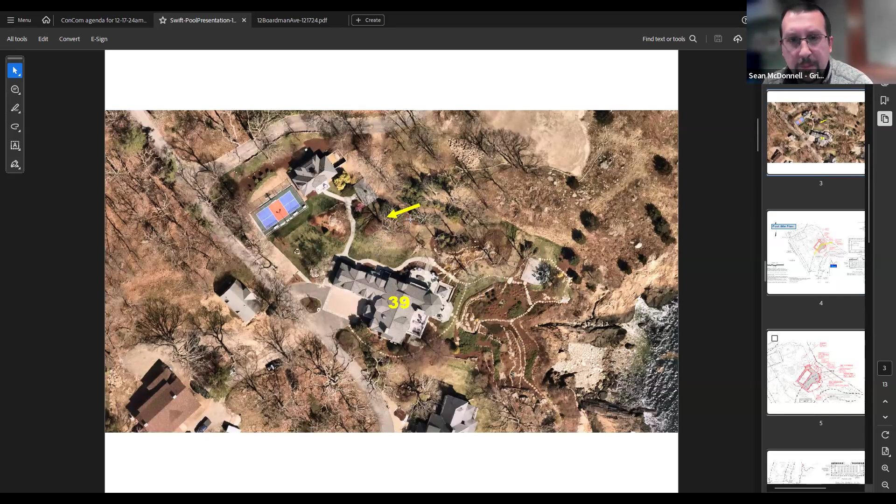There's numerous plant beds around the property. There's an extensive amount of planting along the coastal bank. I think you guys saw another plant down here. So I don't think this area of lawn is going to be too detrimental if we change that to a pool deck with stormwater management. But I see your point.

Was this part of the alternatives analysis? There's no alternatives analysis required unless you're in the inner buffer zones under the bylaw.

Not that people don't think about it anyway, and we often have discussions about whether it's possible to shift the project design somewhat so that less or none of the permanent impact is in the buffer. Does that answer your question.

If I remember correctly, that is an area of exposed ledge outcrop to the north. There's a small area here, you can see it on the plan. There was a small chunk of ledge where the pool is going that will have to be removed. Just in that area. And a larger one to the northeast, northwest.

Well, over here too, there's actually some more to the southeast as well.

It's clear that moving the pool deck, if it's going to be of any size, to the other side requires kind of reconfiguring the other aspects of the property and possibly having a multi-level deck to accommodate that ledge. So it's not a simple solution. It's also not as accessible to the house if you flip it over. Yeah, possibly.

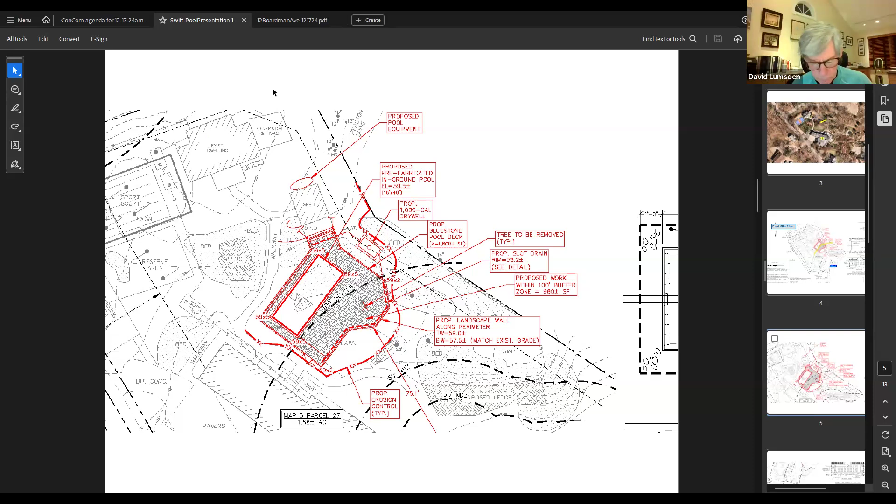Jeff? Aye. Gordon? Thank you, that's an aye. David? Aye. Thank you. Henry? Aye. Olga? Aye. And I am an aye as well.

So that is unanimous. Shall we take a peek at conditions for this? We have the benefit of our absent vice chair's preparation of a draft, which I've been over briefly. Yeah, there it is. Let me share my screen.

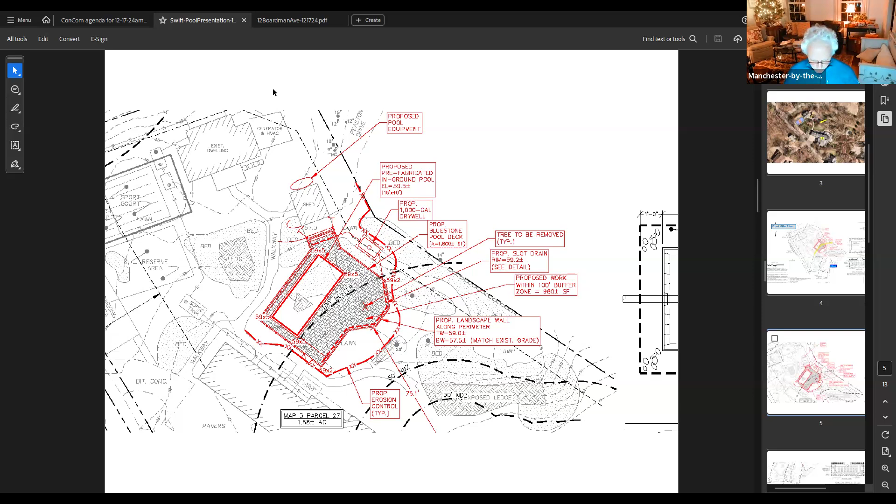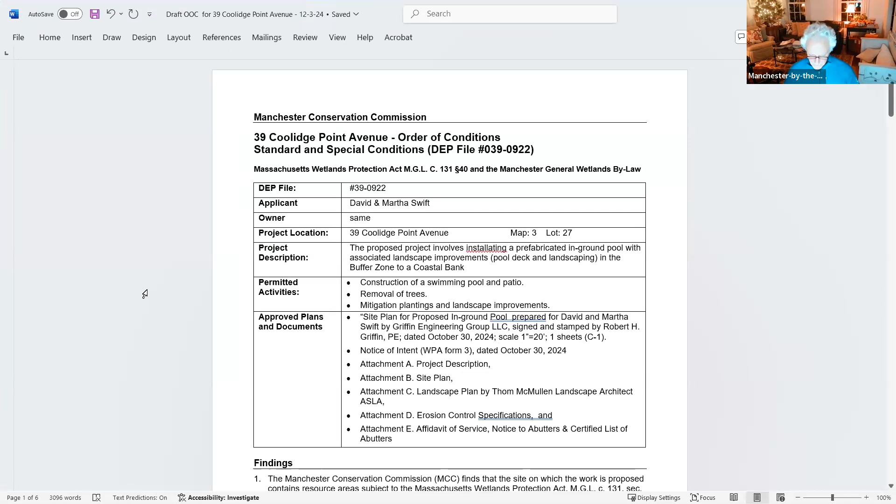Easier said than done. Okay. That's not the right one. That's the right one. Can you see it? Yes, yes. And is it legible? Yes, yes.

Okay, so there's some typos to fix, but there's the boilerplate findings, boilerplate general conditions.

Pre-construction—I think the only thing added here is that we require a certificate of compliance if the other work is still open. I suspect it's already been obtained. Do you know, Sean, if that's been closed out? I think we still need to file the certificates of compliance for the other NOIs. Okay, well, that would be a good move then.

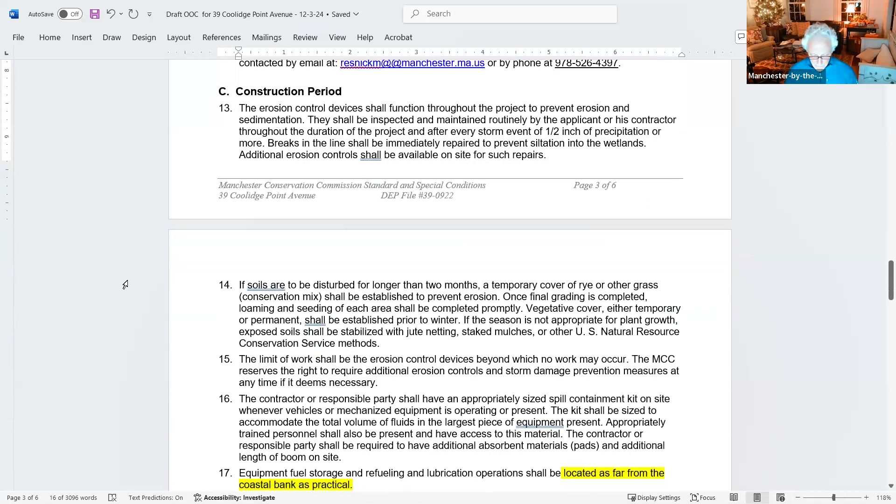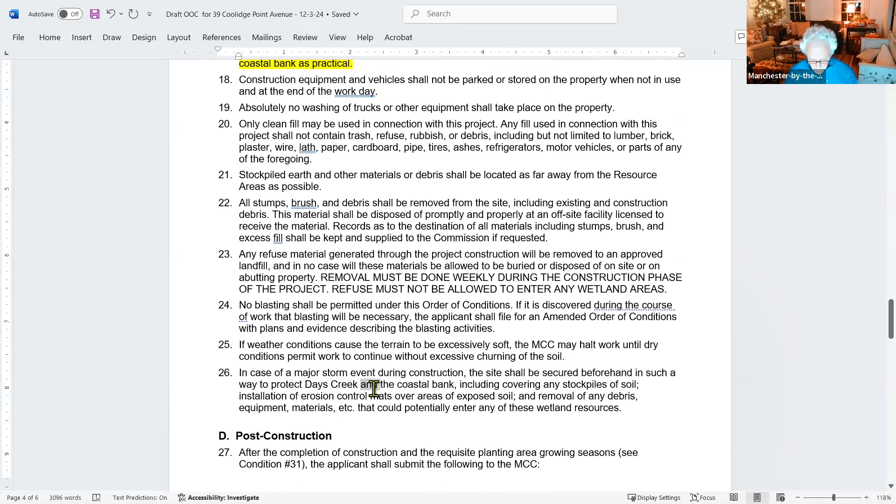Construction pollution prevention plan. We allow equipment storage, fuel storage, refueling and lubrication operations, but as far from the coastal bank as practical. We have to fix that—not to protect Days Creek, but to protect the coastal bank. Post construction.

Now, special conditions. I follow the pollution prevention plan. If any wood is used, it'll only be untreated wood. I don't remember any landscaping elements of wood in this plan.

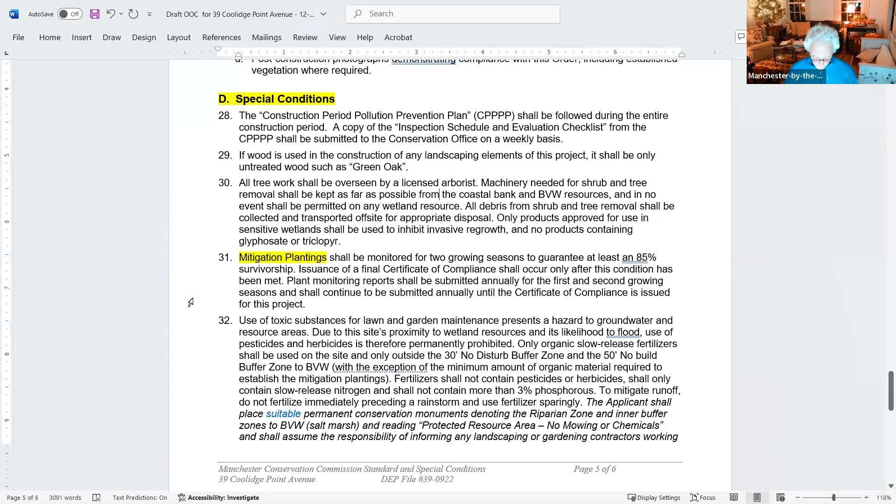Tree work overseen by a licensed arborist. Machinery kept as far as possible from the coastal bank. Mitigation plantings with 85% survivability for 2 seasons, with reports.

No toxic substances. Yeah, here's another sentence that's unneeded. De-icing chemicals to the extent they're needed there. And we are stipulating here a low chlorine method such as ultraviolet.

Is that what the applicant envisions, Sean, or do you know? I'm not sure the cleaning method of the pool. I know it's a fiberglass pool, so I think you can pretty much do anything with a fiberglass pool, but I'm not 100% sure what method they had planned. Okay, well, we'll put in low chlorine and a requirement of dissipating before dewatering.

Selection of some of the conditions as perpetual, including operation and maintenance for the stormwater management. There are no pervious features on this project, right? No. So stormwater management, mitigation planting remains vegetated.

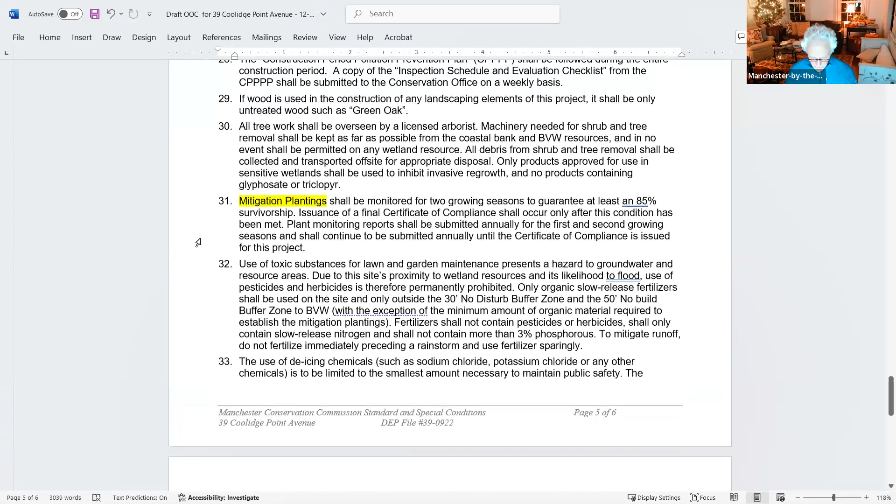And I think we've called for monumenting. No, we have not called for monumenting in this case. That's because all of it is going to continue to be landscaped and maintained.

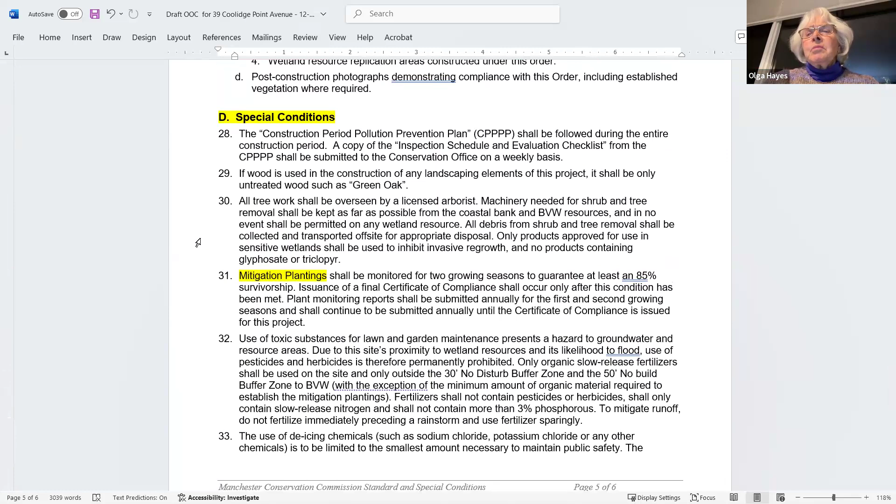Okay, any questions, suggestions, edits, additions to this? So should we also add the pool maintenance and drainage in the perpetual? Or is it fine up there? I think it's reserved there, 31 through 37. Yep, it's reserved because it's— oh, okay, 36. Okay, yep, thank you, good catch.

35 can actually come out, but if there are no pervious surfaces, then it doesn't have any effect. Leave it in.

Okay, commissioners ready to vote on this then? Yep. Can we take that out, Steve? Say again? You said that could come out. Could we take it out? Yes, it could come out. You have to renumber. I'm sorry about the renumber. Okay.

Why don't I just make it a contingent one? Not the most elegant wording, but you get the point.

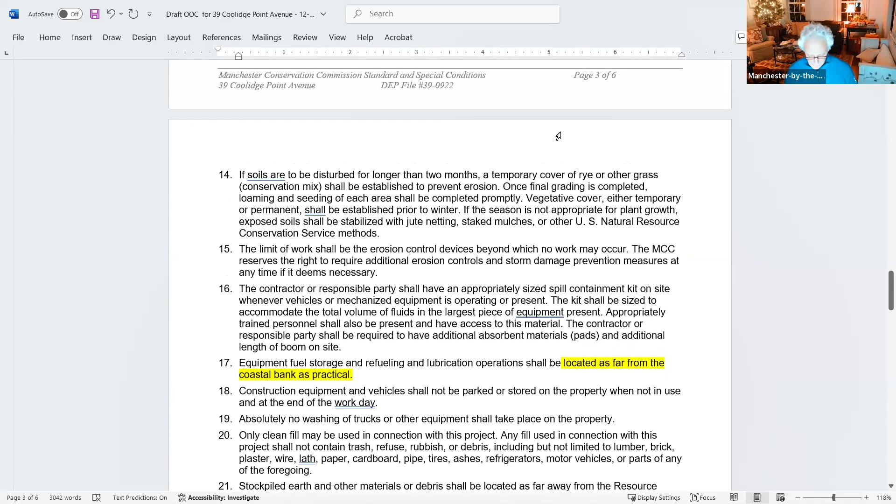It is unanimous. Thank you, Sean. Thank you, guys. Thank you.

Commission ready to turn back to 6 Ashland? Yes. Okay.

Once again, we have a draft largely from Suri with a little bit of input from me, which I will share.

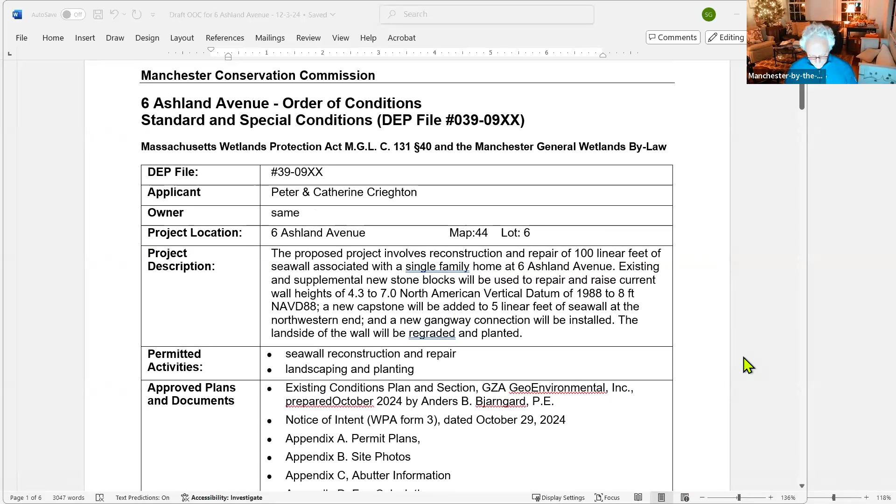Okay, the findings, as expected, the boilerplate general conditions, pre-construction visits, and we have in here obtain and document compliance with the town tree policy, but there is no tree removal proposed here, right? So let's take that out.

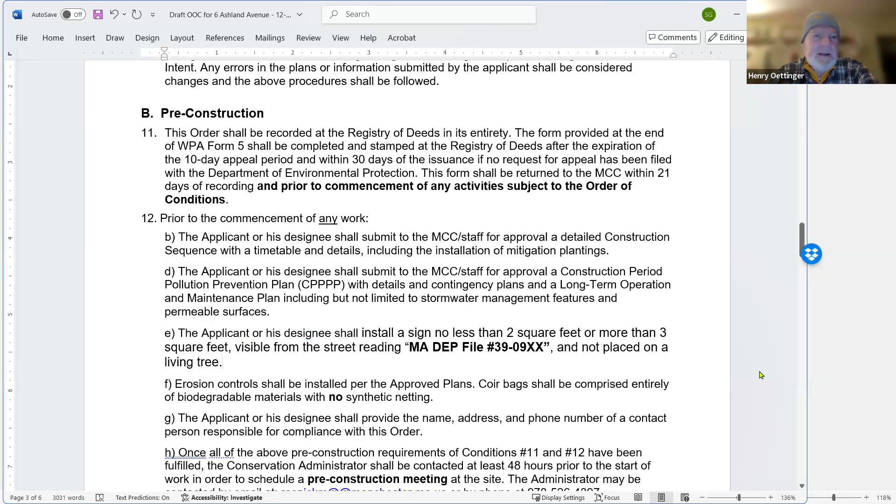Well, that didn't work very well, did it? We'll do some renumbering when we issue this. There's no harm in leaving it, unless it's for compliance with a standard, Steve. Okay, back in.

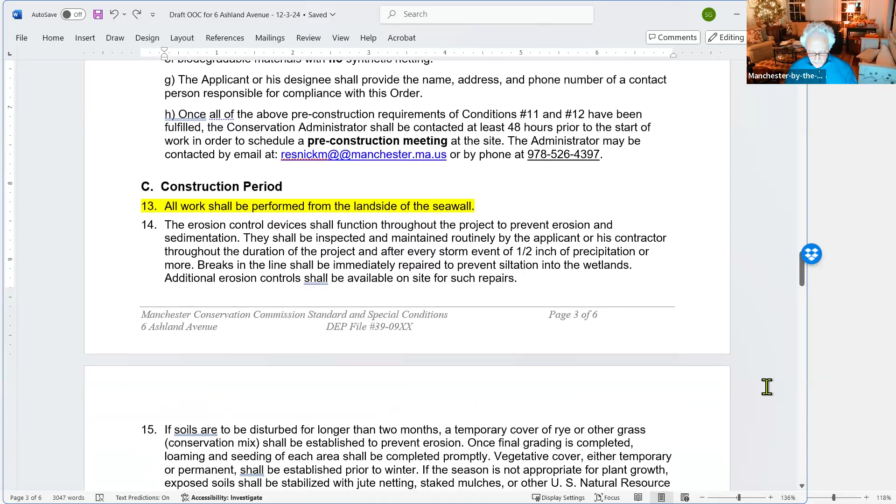All work done from the land side is specific to this project. Temporary cover: locate your equipment and refueling as far from the coastal bank as practical.

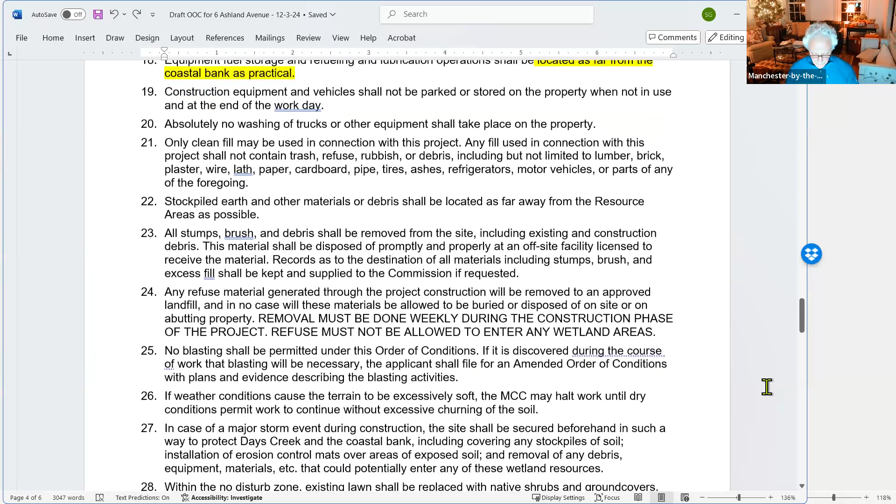Debris. This one would have monuments. If we specify areas that require no mowing, this is drafted to say within the no-disturb zone, which goes most of the way back to the studio, the outbuilding, just past the willow tree.

So that's one option. Another is what Jeff was talking about, to have a border of grass or shrub that's shallow rooted but would provide some additional velocity break and potential habitat. The third would be to have patches of it, which is what Lolly was thinking of. That's what Olga was thinking too, put it behind the wall there, a strip of it.

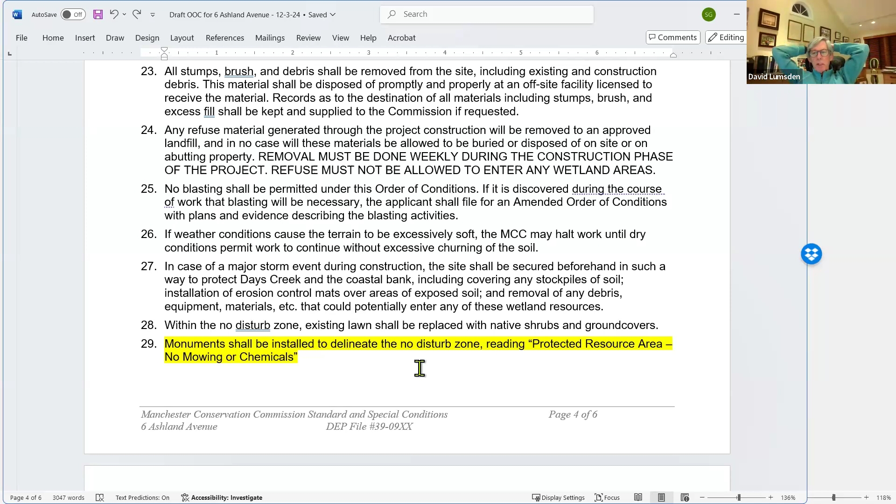That sounds sensible to me. That might be a safety factor for children, and plus it would allow him to continue to use that back area as a play area for his kids. Good points. And I believe the wall is going to be visible above grade for some distance.

I don't remember whether we were told it's a foot or 2 feet. 1 foot, yeah. So it'll soften that element of it.

What kind of monuments are we talking about here, Steve? We're generally accommodating whatever the applicant wants to use, but something relatively permanent: wood, a large post, or small granite monument. We've sometimes, because of the need to really enforce, required boulders so it isn't possible to mow around or beyond them, like a couple of cases on Proctor. Well, I doubt that's required here. No, I don't think so.

Susan St. Pierre, I think your hand is up. Is it in relation to 6 Ashland? Yes. On that condition, we just want to make sure they have access to their gangway. Oh yeah, absolutely, so there'll be a gap in the planting, or stepping stones or something to get you through the higher grass. Thank you.

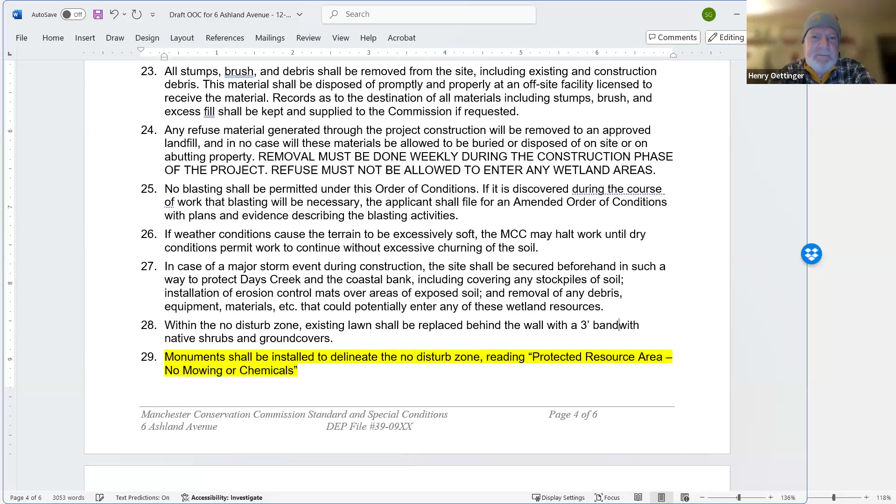Existing lawn shall be replaced with a 3-foot wide band behind the wall. Well, it's not going to be replaced everywhere, it's going to be mowed to accommodate access to the dock. That's the second point, first we've got to establish the band. Existing lawn will be replaced behind the wall with a 3-foot band of native shrubs and ground covers,

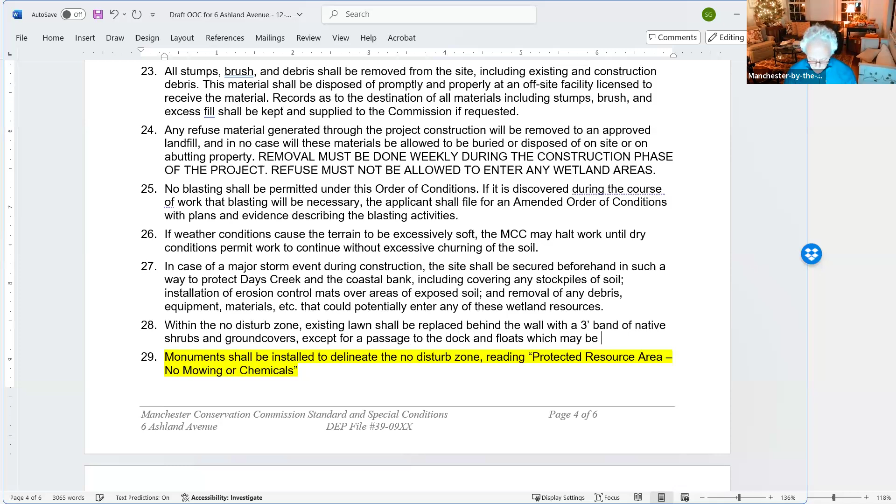except for a passage to the dock and floats, which may be mowed for access. Okay, and I'm not sure we need monuments to protect a 3-foot strip. No, no, good, seems to be asking a lot.

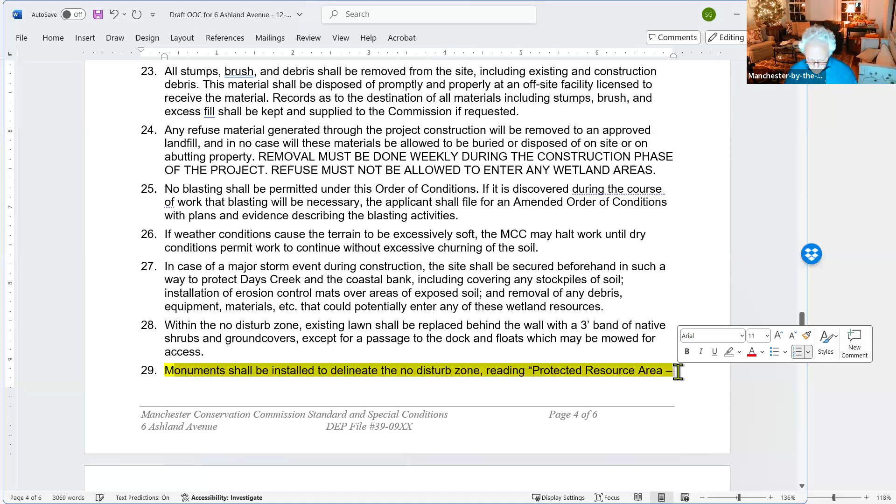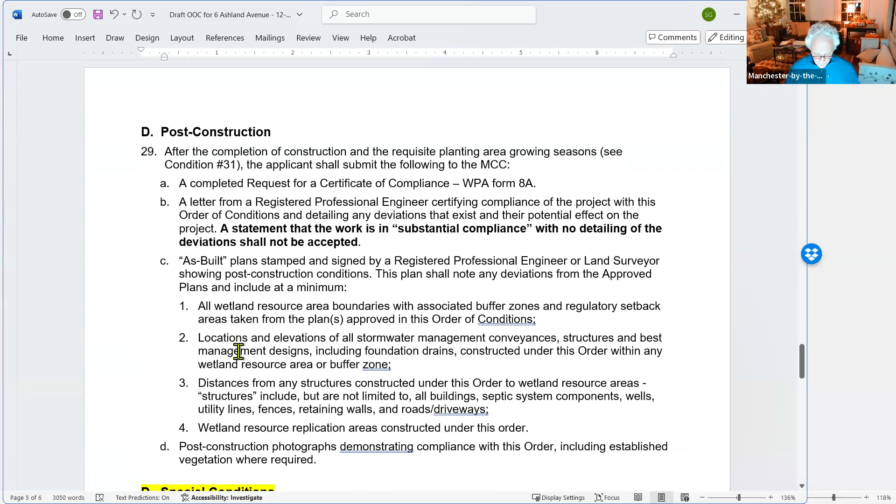Okay, post-construction, let's - I had a quick question if that's all right. Yes, go ahead, Lucas. So under that condition talking about native shrubs and ground covers, would that - I know earlier we talked about some fescue type or the Pennsylvanica carex.

Similar species, like a grass-type ground cover, native, that's what Lolly was talking about. Would that still constitute under this condition? Yeah, why don't we make that clear with shrubs and/or ground covers, let's make the band shall consist of that.

Actually, I guess we want the band to consist of that, and we want the lawn to consist of that. I'm not following, how much of the lawn are you talking about? Is Lolly still on? Can that be mowed? Not the 3-foot band. I'm trying to help you keep one thing consistent - if that's mowable, then just use it for the lawn and the band.

I think if you went with Carex or other fescues, you can mow it if you want to. The virtue of it is you don't need to. If you let it grow up to its mature height, which is fairly short, like 4 or 5 inches, it looks different but not unattractive at all, and requires no irrigation.

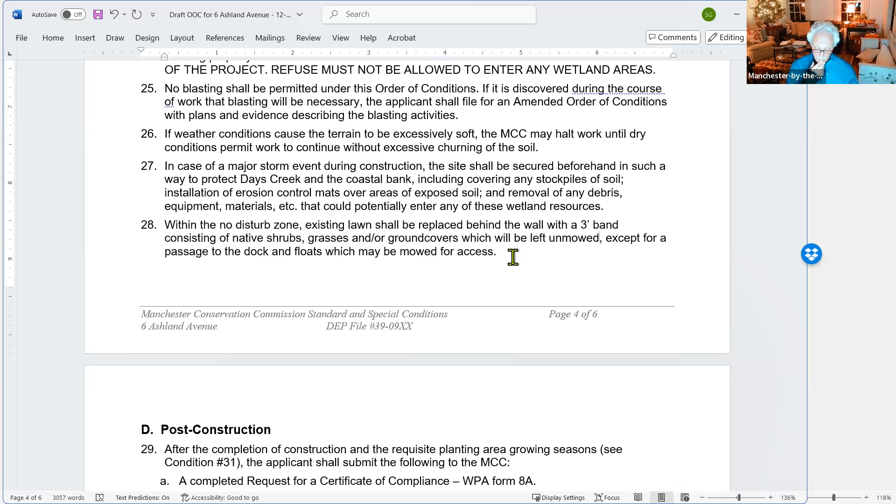And to be technical, if it was mowed in the fall, that wouldn't be a terrible thing either. No, but we never said that.

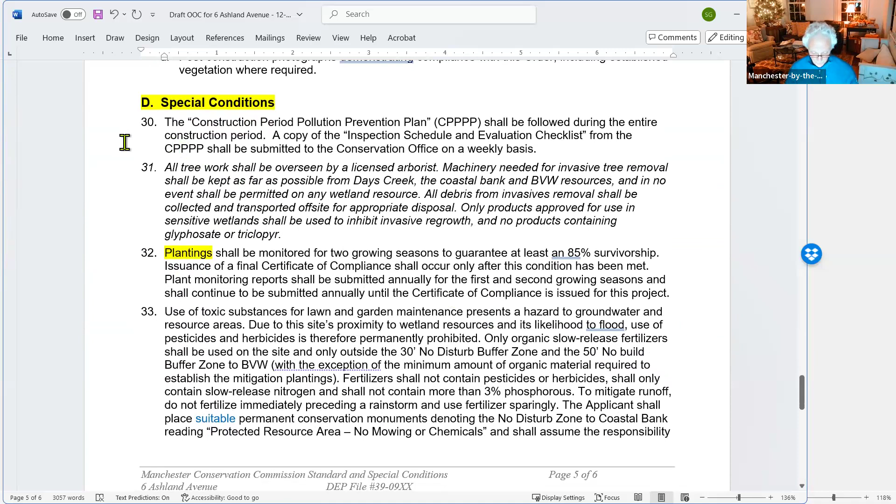Okay, post-construction and special conditions are the standard construction period pollution prevention plan. Tree work, we do not need. Invasive removal, we do not need. Survival of plantings, yes.

I think it's a good idea to minimize nitrogen and phosphorus and any pesticides or herbicides in this area. Yes.

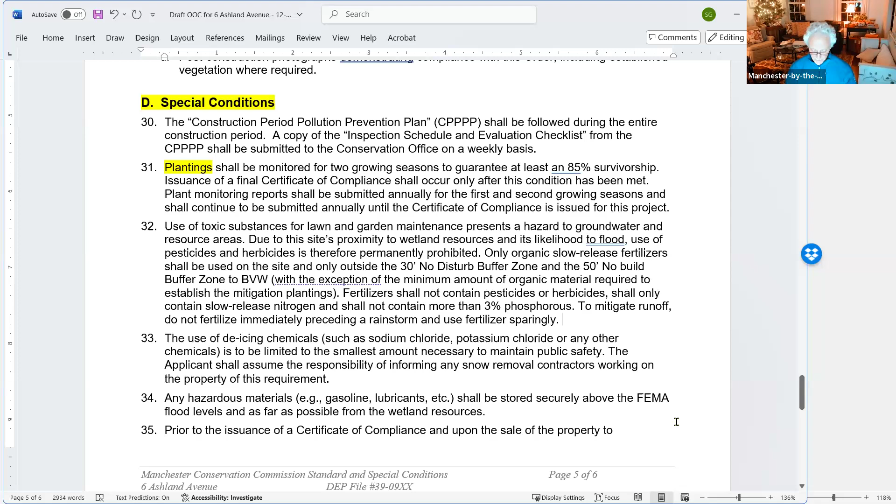And we'll take out the frequency. I don't think de-icing chemicals are going to come into play, but no harm in leaving it. Hazardous material, that's a good idea because of the flood.

Steve, why did you take out that last statement? Because we're not requiring monumenting here, but we think it's needed to require that there's no mowing or chemicals. Well, no chemicals. Well, for the 30-foot strip, yes, but we assumed it didn't.

It's small enough not to require a monument. Am I wrong there? No, I don't think that needs a monument.

And for the sake of the harbor and water quality, it would be great to minimize the use of high-powered, quick-release fertilizers or pesticides or herbicides within at least the 50 feet no-build and no-disturb zone.

That's part of standard conditions, is it not, Steve? Usually, yes, I can't think of exceptions to it. Is it in the standard conditions above? No, it's in special conditions, because it's usually associated with mitigation plantings and the extent of impact to the buffer zones.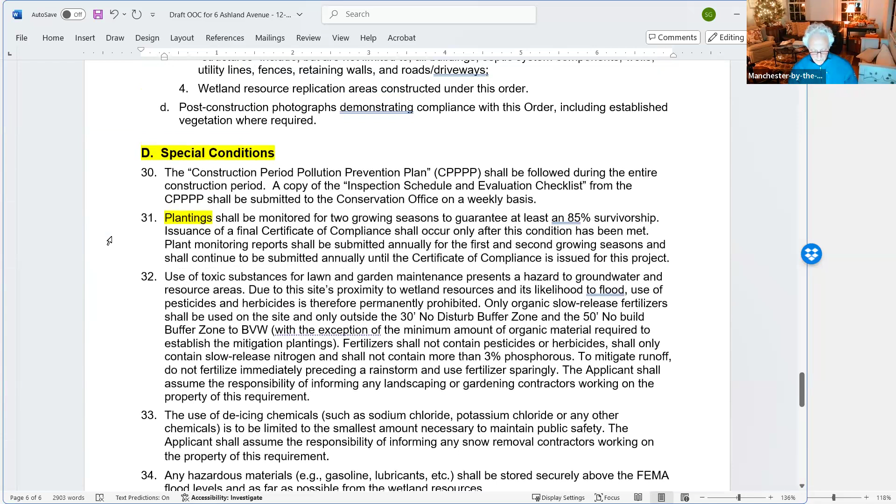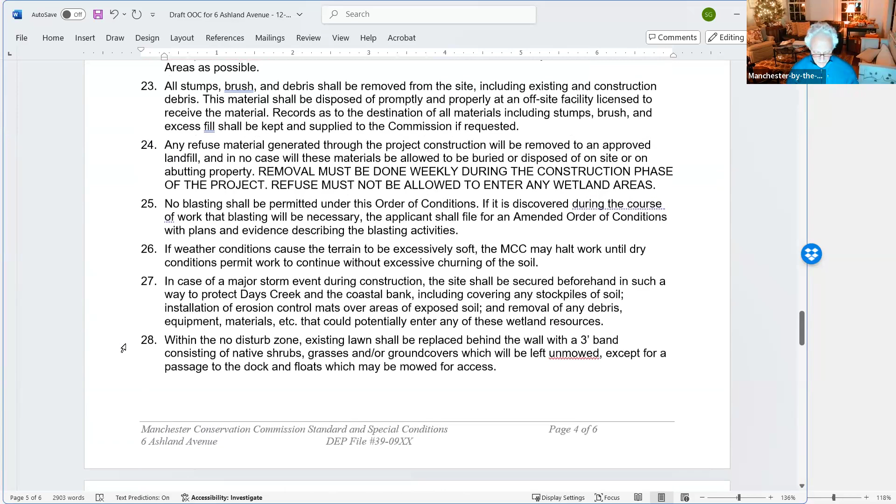I think that's right. So we're leaving out the construction period and the growth survivorship period. Let me just take us back through the special and perpetual conditions.

Looks okay to me. Steve, any final suggestions? Do we need to condition anything about the various permits that are required, or do we just let that process take its course? I think those are in our standards here.

Okay, anything else we want to call out? I mean, this one was meant to be comprehensive. Doesn't mention coastal zone management, but it's implied if it's needed. And 91 is included in that, Steve? I think so, yes. Okay, Corps of Engineers.

All right, so I move we issue this order of conditions with the pertinent special and perpetual conditions for 6 Ashland Avenue, DEP file 39-923. Second. Moved and seconded.

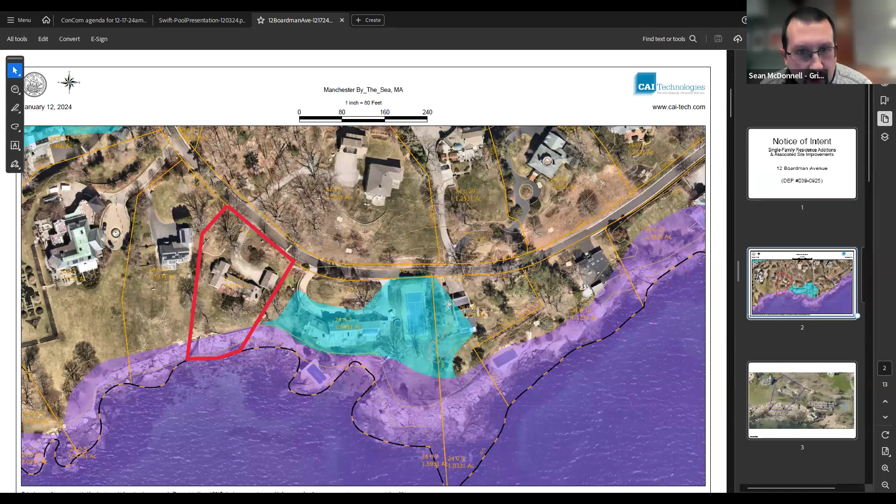This is a GIS map of the area showing some flood zones and the property boundaries. Boardman Ave is up here on top. There's a driveway that comes down in front of this house - a single family house, single story. This is the ocean down here. You can see there's some flood zones at this site - a V zone shown in purple, and a smaller A zone shown in cyan.

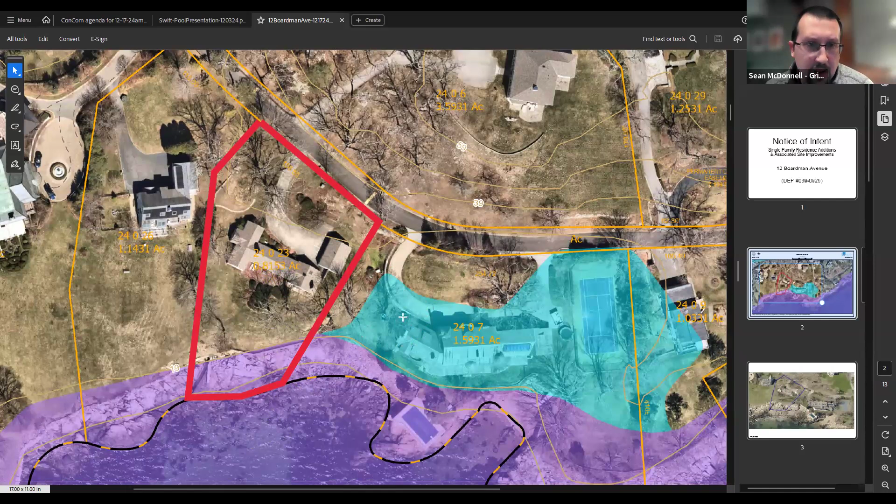Here's a better photo of the spot. The applicant is proposing to construct some building additions on the house and redo the patio in the backyard.

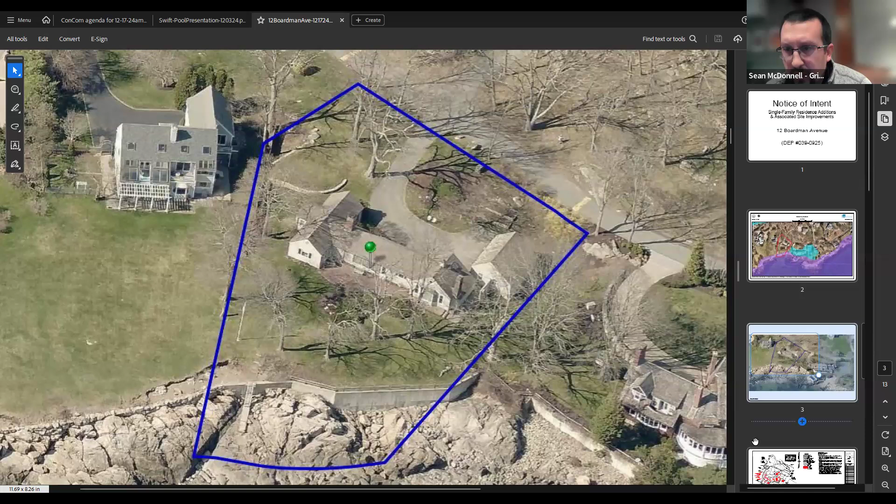Here's a site plan. The red areas are the proposed improvements. There are 4 small building additions going on around the house, the hatched areas here - about 300 to 400 square feet total. This brick patio is going to be converted to a pervious bluestone patio. We're also proposing a small spa here - the square shown is the spa - and an outdoor shower on the side of the house.

You can see our coastal bank line comes pretty close to the house. That delineation was based on the FEMA flood zone elevation of 35 feet - that's the A zone here. This site is a little tricky because it has both a V zone and an A zone. The V zone runs along the seawall, and the A zone is off on this neighboring property. It's at elevation 35, which is pretty high relative to the grades on this property. Typically we draw A zones at the contour matching the base flood elevation, but in this case it's more complicated. We have a LOMA request filed with FEMA for additional information. Right now, as drawn, the house is shown outside the flood area.

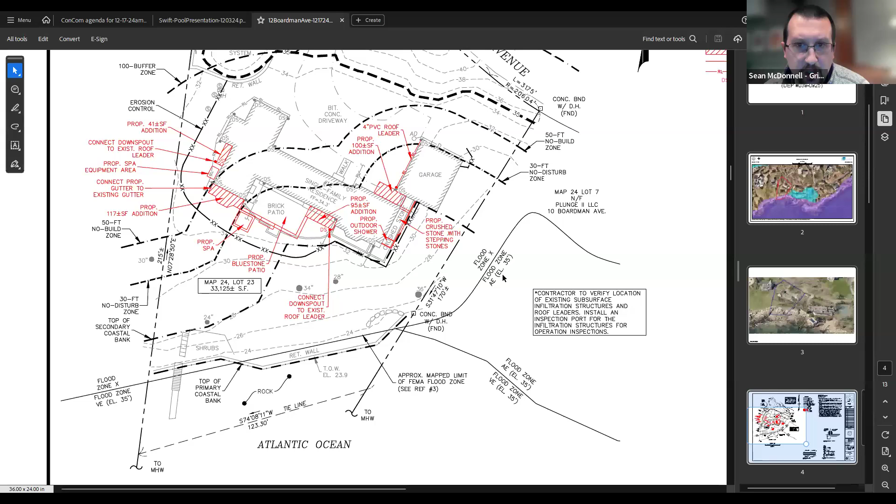Based on that elevation 35, the coastal bank ends up being pretty high on this lawn. This is a lawn area, and this is the top of the wall down here. The coastal bank ends up extending up to the house because of how DEP defines it - the area below the base flood elevation that ceases to be greater than a 4-to-1 slope. So that's what that line depicts. It ends up being pretty close - if this base flood elevation was lower, it would be the seawall. It's really just because of how FEMA defines that flood zone.

And in practice, does water come over the seawall, say in those January southeasterly storms?

Do you want me to respond to that? Sure. I've spent one winter there, and no - the base of the house, as I understand it, is about 32 to 33 feet above mean high water. We have seen some storms, but I've never seen water get even really to the base of the seawall other than wave action. When waves hit the rocks, the spray can come up onto the lawn, and there's some scouring effect on the lawn, but I've never seen water come up even near the top of the seawall.

That is an unusual FEMA finding. Yes, we're expecting to hear back within the next couple weeks, maybe longer - I think they have 60 days to respond. We filed at the beginning of November with FEMA, so we're waiting to hear back from them.

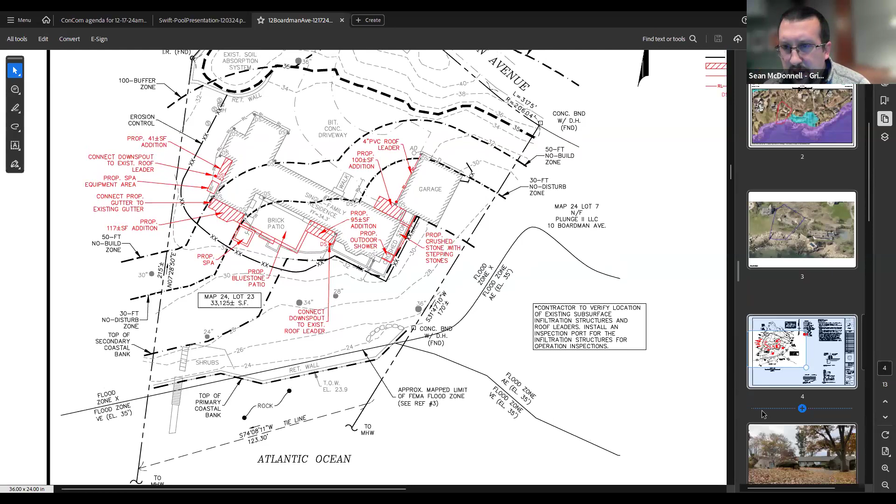Let's see if there's anything else - I have some photos of the site. It's a single story house; this is the front looking down the driveway, and another shot of the front. This is the backyard - at the top of that slope is the brick patio that's going to be replaced, with some small building additions going in the corners. And here's a shot of the top of the seawall currently.

Anything else here? That was taken from the seawall, Sean? Yeah, that's the top of the wall, looking out along the wall. So standing down here, I think. Yes, yeah.

Does anyone have any questions? I have a question about, so there are four exterior changes being made, and I understand that they may not physically impact the resource, but they're within our delineation area.

What are the improvements being made in these small areas in the house? Would you like me to address that? Sure. So you're all looking at this plan, the areas to the left-hand side, that's a small addition. The bathroom to the primary suite is quite narrow, and it has one sink and a shower, and it doesn't accommodate two people at a time. My wife and I are hoping to age in place there, so we wanted to have more accessibility, and that addition to the side and front gives the primary suite a little more space for closet and bathroom area.

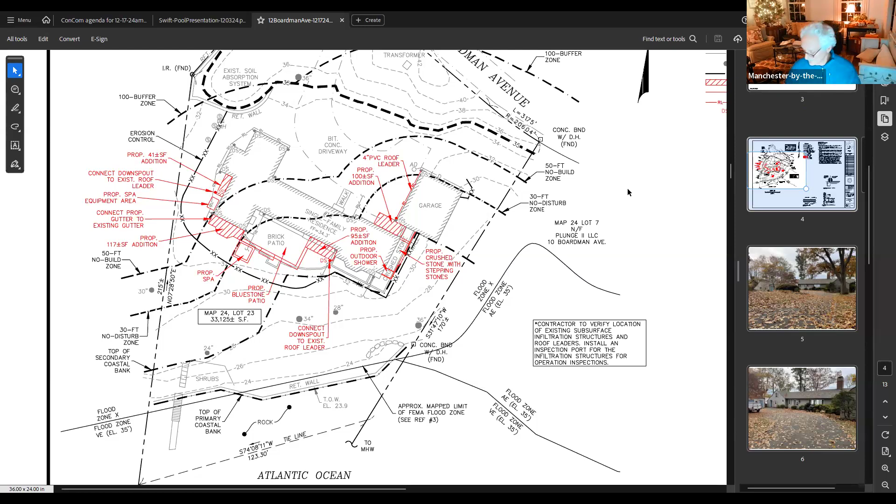So I'll move, with the applicant's consent, that we continue this to our next meeting, which I'm not entirely sure what day in January. Anybody know? January 6th. 6th or 7th? Monday's the 6th, so it's the 7th. Well, it all depends which way we go. So it's either January 7th or 14th. I'm going to say January 7th. Is there a second? Second.

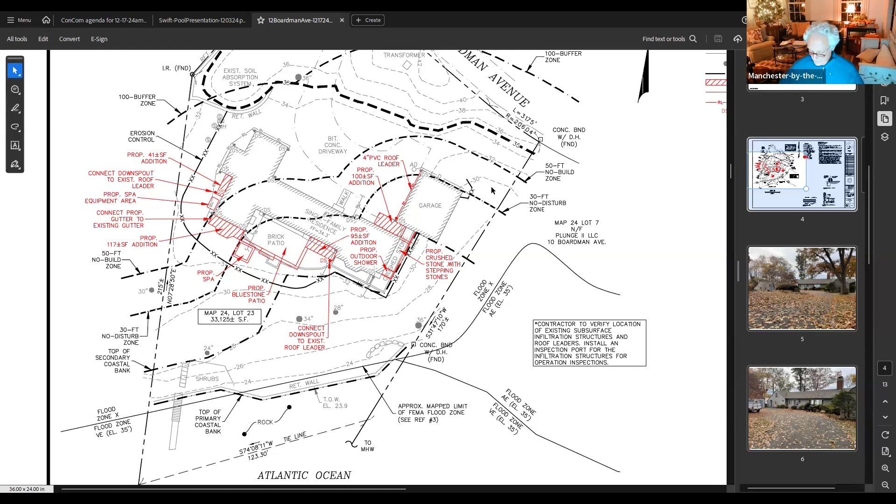All those in favor: Olga, aye. Jeff, aye. Gordon, aye. Henry, aye. David, aye. And the chair is an aye, so we'll see you folks at 9 a.m. on Saturday. Thank you very much. We will be there. Thank you, John. Thank you.

Which brings us to our final NOI tonight, new from 110 Bridge Street, map 22, lot 6, DEP file 39-924, for Prescott Logan and family: relocate driveway, landscape, install a patio, change grades, replace the detached garage, remove a storage shed, renovate a barn, build a fence, maintain the stream, and put in native plantings.

Again, we'll stipulate that the hearing has been properly noticed in the Cricket and that we are in receipt of abutters notices.

And who's here tonight, Caitlin, is that your? Good evening, Jay Polakiewicz with Hancock Associates. I'm representing the applicant in their notice of intent for, I'll just shorten it up to, site improvements at 110 Bridge Street. So here with me tonight is Caitlin White from our Wetland Science Department, Hilarie Holdsworth, who's the landscape architect, and Prescott Logan, who's the owner.

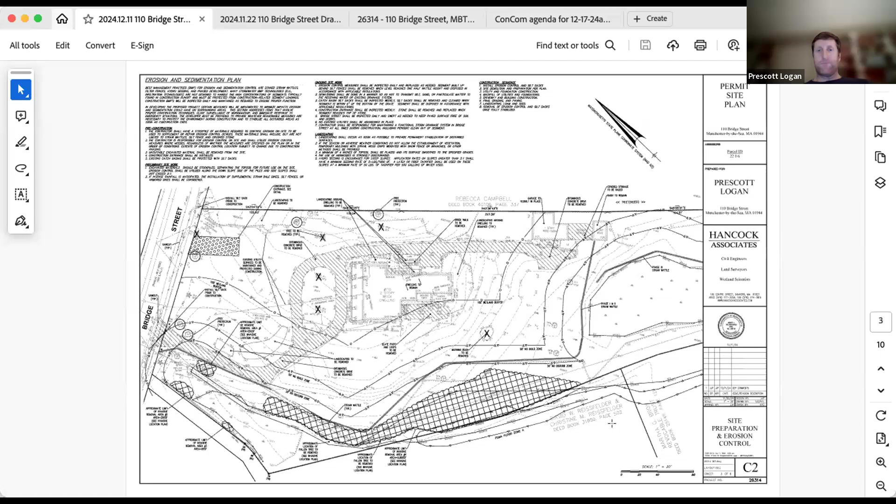Jay, the one detail I'd add to what you just said is we're also removing—there's a roof that spans between the garage and the little barn there, and we're eliminating that roof.

Is Hillary on here? Yes, I am here. Good evening, commissioners. One thing I would add is that the impervious asphalt driveway being removed within resource areas amounts to 3,312 square feet. That's getting removed. And with this new bluestone granite terrace, we're getting a net gain of pervious area of 349 square feet.

As far as plantings, the riverfront and intermittent stream area is 100% native planting, as is the pond area. When we get closer to the house and outside resource areas, it's a mix, about 47 native plant species out of 75 total.

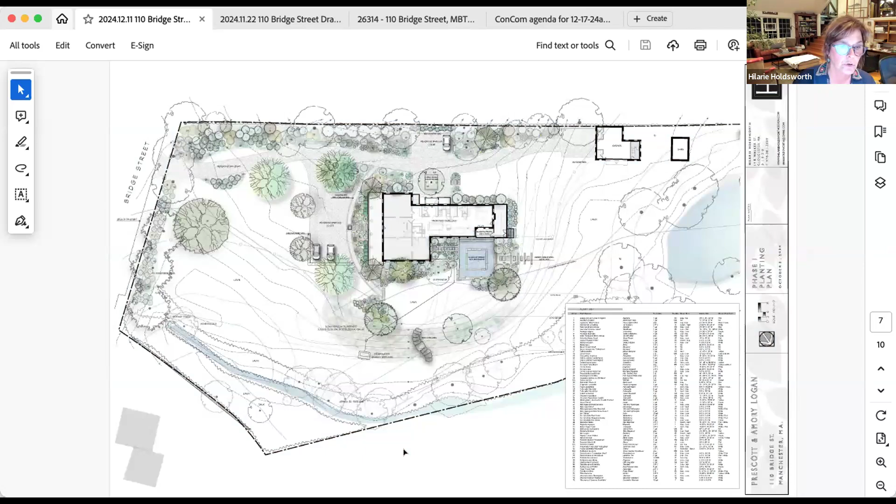A lot of this is outside the jurisdiction of the Conservation Commission. Not sure what else I can add as far as specifics.

I will say the plants scheduled to be removed, some of them are pretty noxious and invasive, including Syringa reticulata, Norway maples, Japanese lilacs, burning bush, privet, bittersweet, honeysuckle—all the bad guys. We plan to remove those from that area.

And Hillary, are you in favor of making the bluestone and granite patio pervious? Well, it'll have 1/4 to 1/2 inch joints, so I'm not sure if that is a pervious spec.

What is it filled with? The joints are filled with stone dust. So that is pervious. Okay, so we'll certainly ask for rice gravel or something larger—not stone dust under any circumstance would be great.

Thank you—not Henry's first rodeo. That was polite, right? Very. You just like saying rice gravel, I can tell. Can we eat it? Just kidding—properly prepared, delicious.

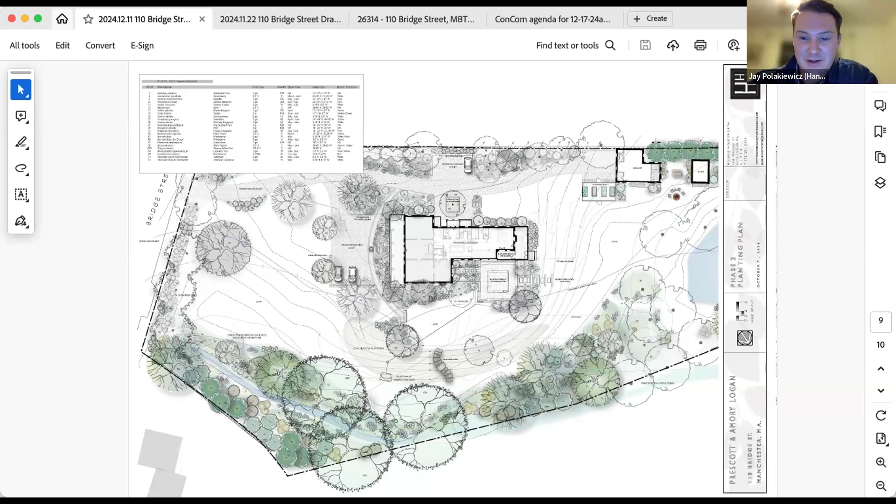Are you suggesting a Saturday site visit? I am—9:30? Are you suggesting 9:30 on the 21st? Yes, that sounds admirable if that's acceptable to Mr. Logan and the Hancock folks. I can make that work. Prescott and Hillary, are you guys available then? I can do that too. Yeah, that'd be great. Okay, it's a date.

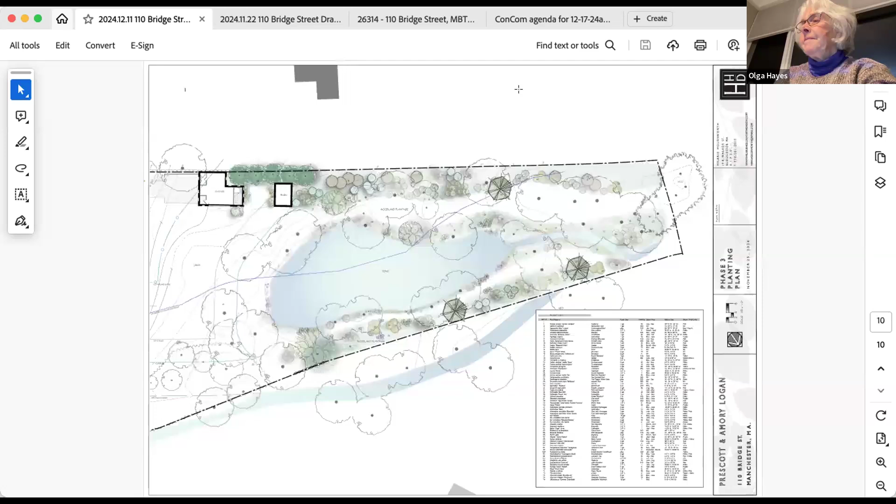But are there other questions or comments besides rice gravel while we're here? Well, this was a really nice project to read about—it's beautifully done, thank you, the write-up is excellent.

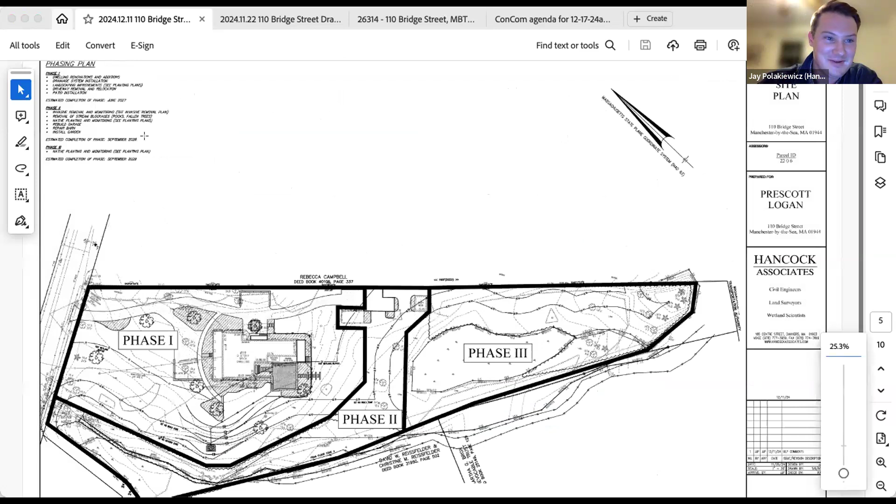I cannot remember what the prospective timing is—is it contingent on how long each phase turns out to take? Do you have an estimate of that, Jay? Yeah, give me one second, sorry, I'm not used to using my laptop.

Okay, there we go. So estimated completion of phase 1—we'll start phase 1 in June of next year, and it's estimated to be about 12 months. The next phase will be completed around September 2028, and phase 3, which is the pond area planting, September 2029.

So we wanted to do this all as one notice of intent to the commission, just to show everything that we're hoping to do on this site and how we believe it's a benefit to the resource areas, and to give an overall project idea. Appreciated.

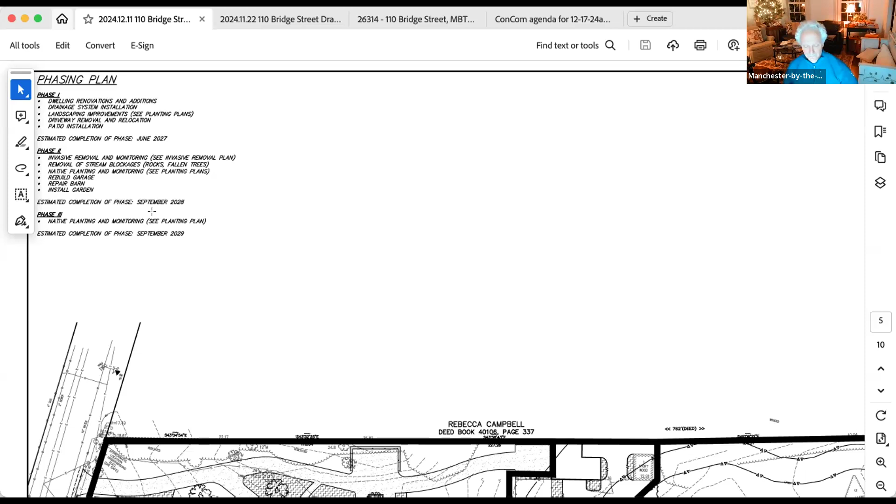Thank you. Is there any comment from the public on this, 110 Bridge Street? I'm hearing none.

Could we get a clarification on what you just said—that phase one is going to start in June of 25 and take about a year and end in June of 26 or 27? So the work on the house will start in June of next year, June of 25. It'll take about 12 to 14 months, and then the landscaping will be done at the end of that. Depending on how fast the house gets done and weather and those kinds of things, we'll either finish the phase one landscaping in the fall of 26 or the spring of 27.

So we just picked the spring of 27? Yep, good catch.

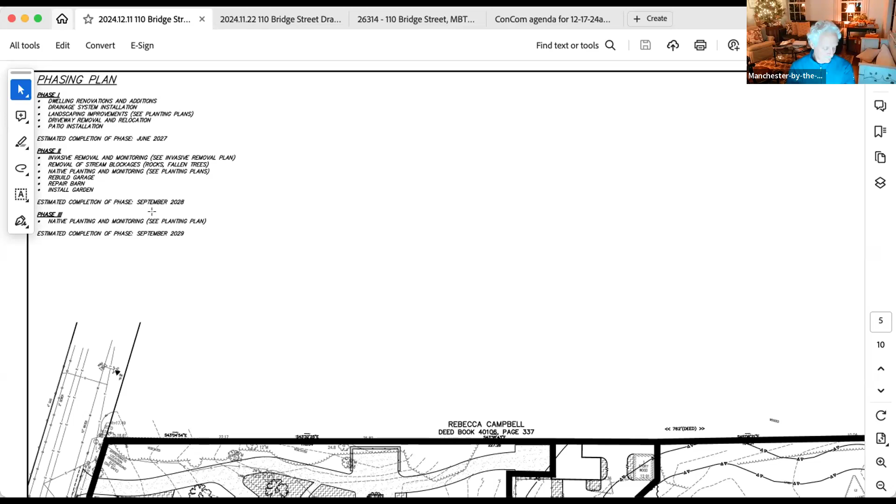Well, let me move with the consent of the applicant that we continue this to our next meeting, most likely January 7th, 2025. Is there a second?

Second. Thank you. All those in favor? Olga, aye. Jeff, aye. David, aye. Henry, aye. Gordon, aye. And I'll make that unanimous.